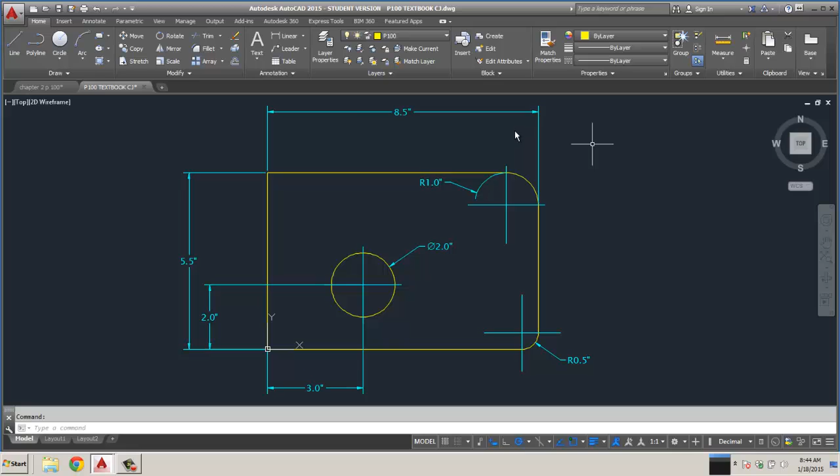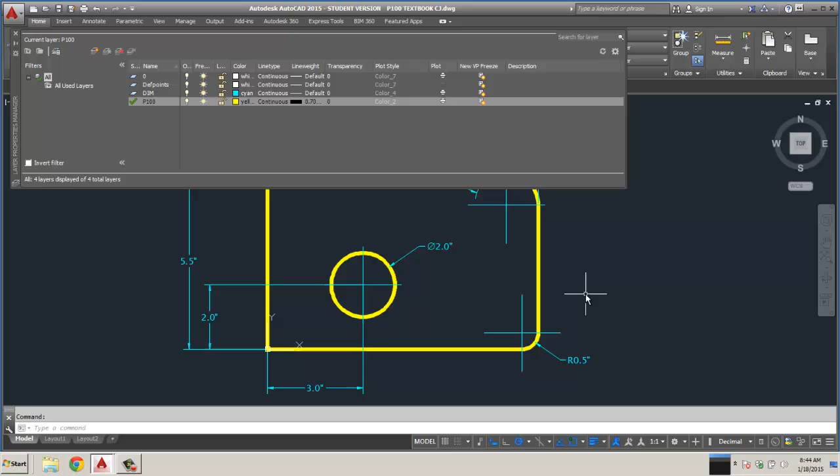So you didn't see anything happen here, but if we go to our layer properties, because we're going to set our line weights to whatever the layer is, by layer, we'll just go to our layer properties. For our P100, I'm going to change this line weight to 0.7 millimeters, and select OK. As soon as I did that, you'll notice that my line weight here became much bolder on the screen.

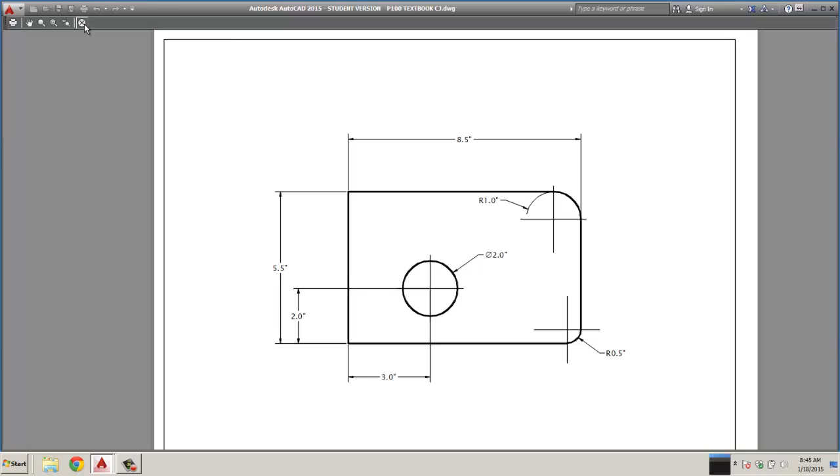Again, my mistake. So that was just how to change the line weight, and I'll do this when I'm showing you things in the video so they show up better. It'll show up the same way in our paper space, but what you'll notice is if I do a plot preview on this piece, set it to Adobe PDF and hit preview, it still gives me the same line weights as before. Whatever that pen table we had set up for it will remain, so that doesn't really play into it. It's just visibility on the screen.

So you can leave it at 0 in your case, or you can change it, but sometimes the line weights on the model become kind of cumbersome. Now, with that in mind, I also had an issue with offsetting this, and unless you set a point, it doesn't change to relative coordinates, so it's always looking for 0, 0. Here's a way around that, and maybe look up tentative offsets and things like that. There's probably an easier way to do it, but I haven't quite found the tool yet.

But we can take our circle tool, and I'm just going to draw the circle at this point, with a 0.5 radius. And we're just going to take our move tool. You can just hit M, move, enter. It says select the object. Okay, get out of it. I'm going to hit M, enter. Now it says select object. Okay, hit enter. My base point, just left click here. We're going to move it over 1, comma, and negative 1, comma, and there it is.

So we can use that 2-point offset to move things into place, as well as the tentative thing where you can kind of line up. But the problem with the tentative thing is it always goes to 0, 0, so you would need to know where to point that. From this point we did 0, 0, so we were able to use it, but from up here we actually need to move it, which means we have to set a point to reset the relative coordinate base to 0, 0 up here, so that we can go over distance and down distance. I'm also going to post a video I found online on tentative snaps, it's only like 10 minutes long, so you may find that helpful.

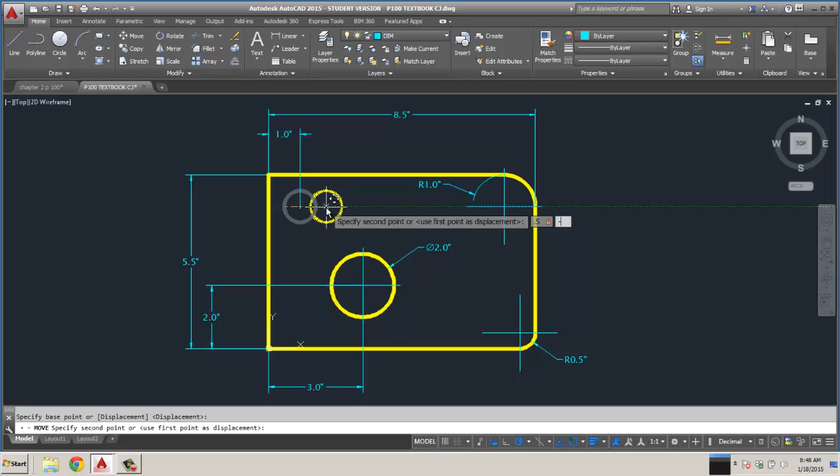Let's see what happens if we move this object, enter. We got to go 0.5, comma, negative 1.5. Look at that. It moved the dimensions and everything because it is attributed to that circle. So now we'll come to this point and go down 1.5. Okay.

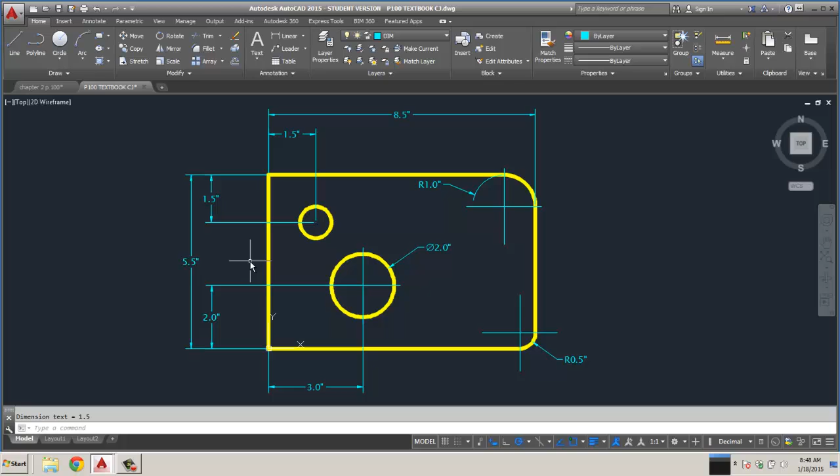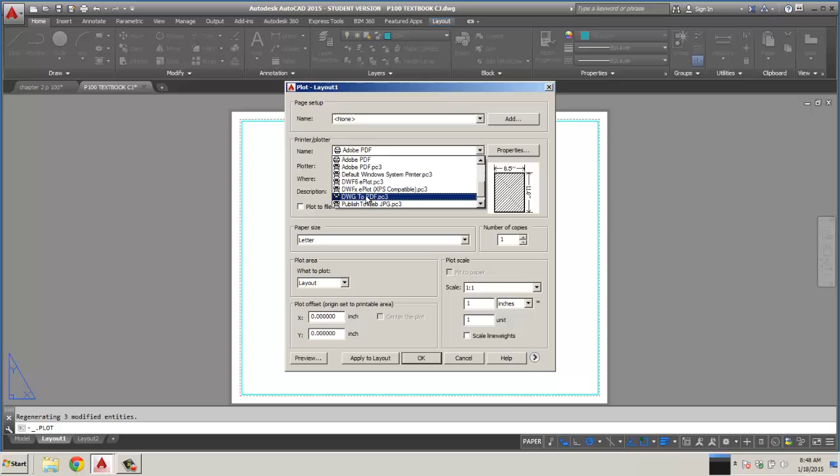Go back to our layout. Still good. Right click, hit plot. Set it to Adobe PDF. Let's just take a quick look, for the heck of it, try this one just to see. I'll hit preview, looks good. We'll hit print. I'm going to put this on my desktop next to the other one, which was right here, assignments.

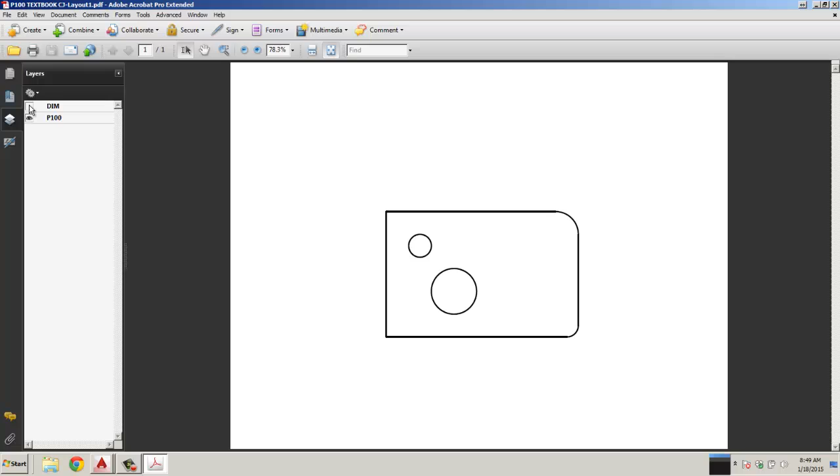So there's our PDF. Now the difference by doing it this way, it's still a PDF file, but you'll notice over here it maintained our layers. So this is a layered PDF. So if I don't want to see my dimensions on the drawing, I can actually turn those off so they don't show up. It's basically maintaining our layers so that we can turn things on and off within the PDF file. Anybody that you mail this to will actually do the same thing. So it's just another cool tool to use.

And we'll probably end up using this as our export tool for your homework, so that we can check your layers, make sure stuff is in the right layer, and you know, that's important.

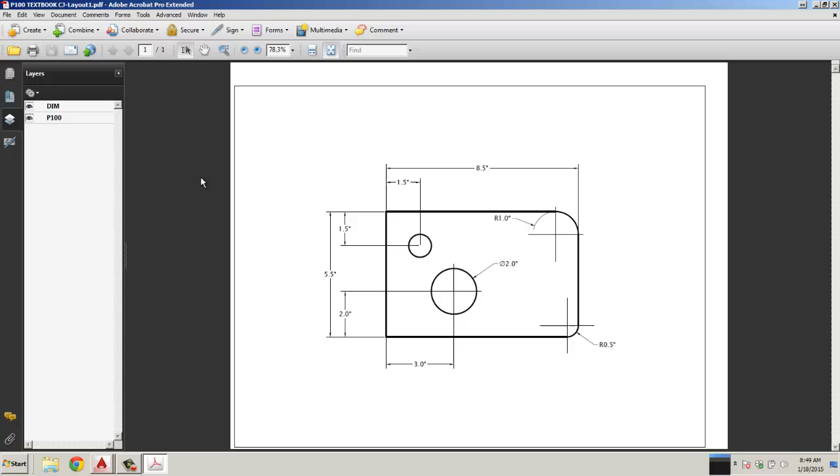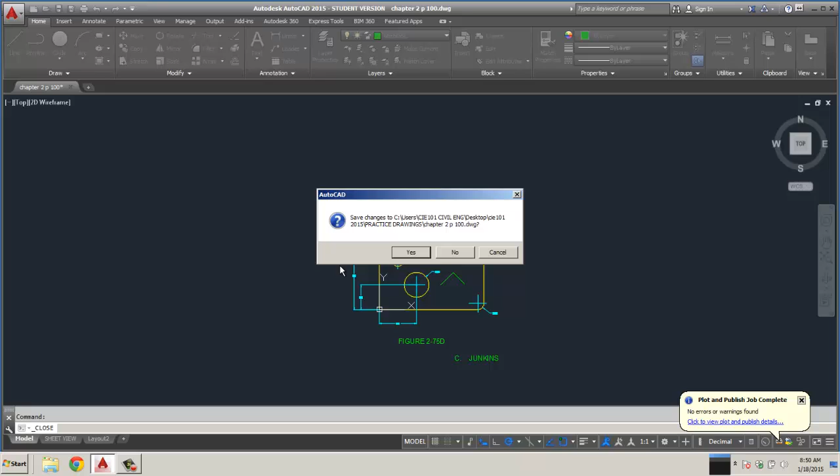Get out of this, and I always like to go back to my model. We'll do a file, save, and we'll file close, close. It's an old one. Brings us back to our home screen. We'll just close this out.